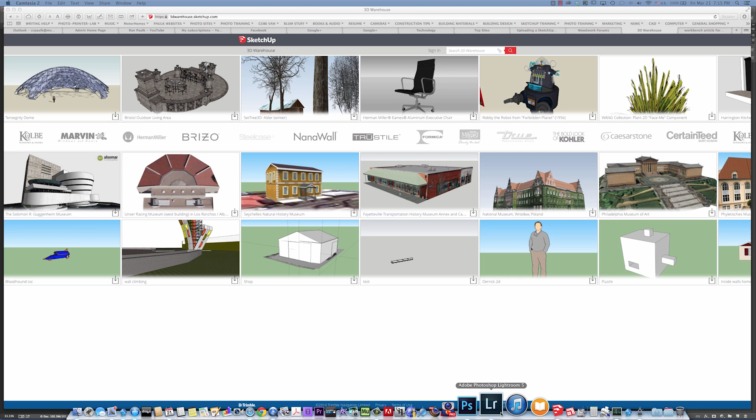Hit the R key for rectangle, and enter in 1 foot by 8. Enter - oh, it turned it that way. That's all right, we'll go that way with it. So next thing, double left click, right click, make group.

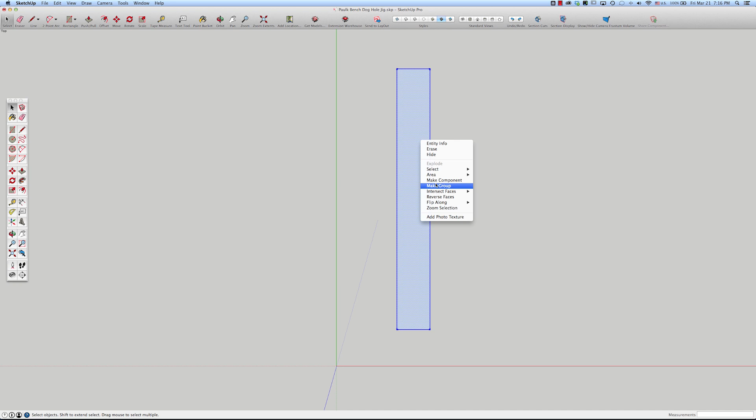So this jig is temporarily put dimensions on it, 1 foot by 8 feet. And I'll hit the T for the tape measure tool and drag.

This will be the reference edge. We'll drag that out to 8 inches, type in 8. When you enter your dimensions in, if you're doing inches in the feet and inch setup, you don't have to enter in the inch mark, but you have to enter in the foot mark. If you want to type in 8 inches, you just type 8, enter.

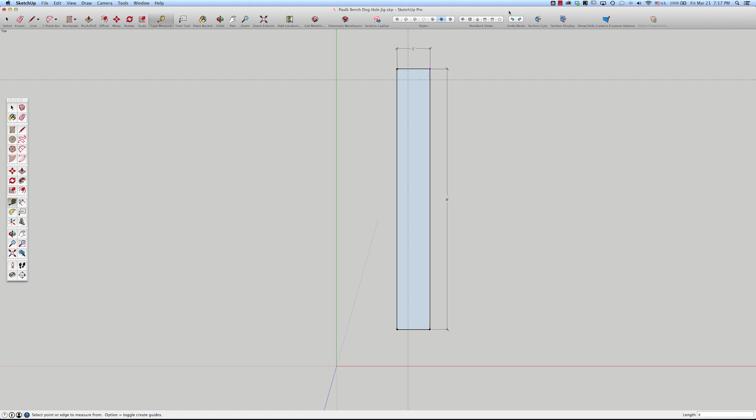And I want to start the first hole 4 inches in from the edge, so 4, enter. I'll need a couple more guidelines later, but for now we'll start.

Now, before I go in and do the holes, I know I want them 15/16, but if you want to figure out your own sizing, the way I determine what size hole to drill is I know I'm using a router template guide, which adds 1/16 of an inch all the way around to my circle diameter. The way you can figure it out yourself is if you measure your router bit and your template guide, the difference between the two is how much you want to grow the hole by.

And I know I want the hole to be 20 millimeters as my finished dimension. So I'll hit the C key for circle - this is just a temporary option here, escape out of there and Command Z. So I've got my circle tool, I'm just going to drag it out and enter in 10 millimeters because we're going from the center. I know the diameter I want to be 20, so 10 millimeters, enter. Now even though I am working in feet and inches, I can enter things in as millimeters.

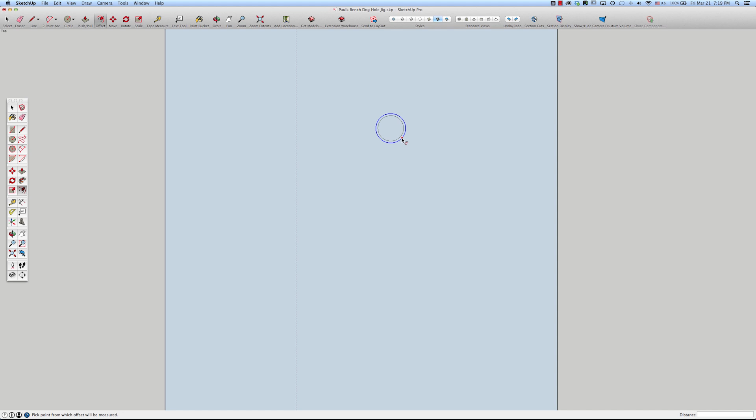Now what I'll do is choose this tool here to the left, which is the offset tool, it's the F key. Hit the F key, grab this edge and draw it out, left click, and I'm going to type in 1/16 inch. So I've added 1/16 of an inch to the 20 millimeters - I started with 20 and added the 16th. So I know this is 15/16, but just to show you how I came up with that, this is the methodology.

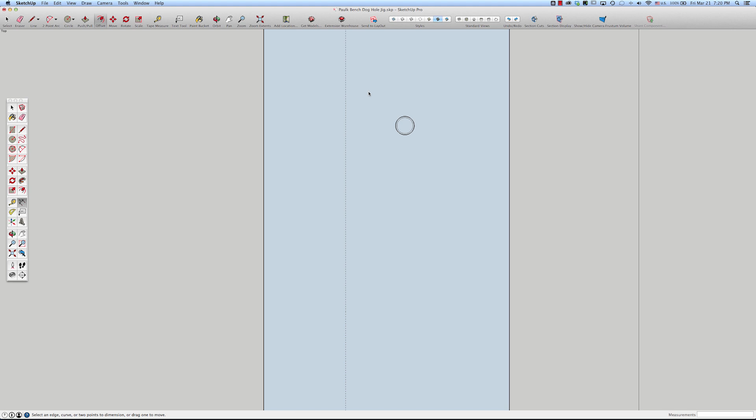I can do it right here in SketchUp. So if I want to double check that, I can grab the dimension tool and just click on the edge of it, and it will automatically draw the dimension. So the diameter is 15/16. Command Z to delete that - I don't need any of this, but that was just a way to show you how you can arrive at that. So I'll just hit my space bar, select that, delete.

Now I know I want the first hole - I'm actually going to be adding a hole closer, but for the initial layout and for the majority of the holes, they're going to be 8 inches in from this edge, 4 inches in from the end, and 4 inches apart.

The reason for the 8-inch offset here is for the first series of holes, I will be clamping this to the edge of the bench, flush it up, and as long as my bench top is square, I will get the series of holes perfectly in a line 8 inches. Then I will use the offset pegs that will drop into these holes once they're drilled to do the rest. So that's the reason this is 12 by 8.

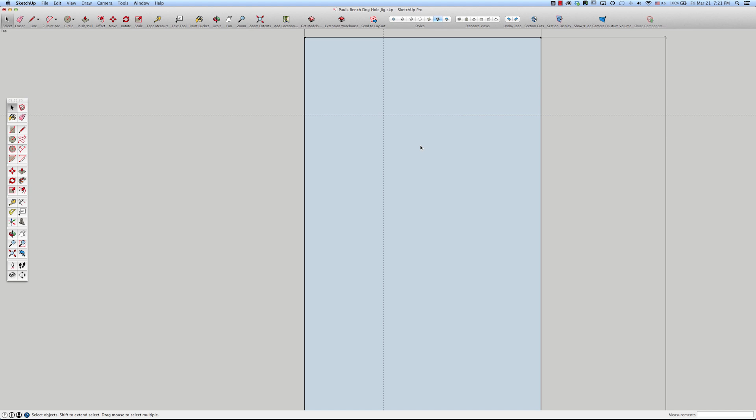To make the holes in the surface, I need to go into the surface. Right now, if I drew a circle on top, it would look fine. Type in 15/16, enter, click on it, delete the center, and it's still there. That's because the hole did not cut through this geometry, because I'm not in the geometry — it's locked up in a group. So Command Z to get rid of it.

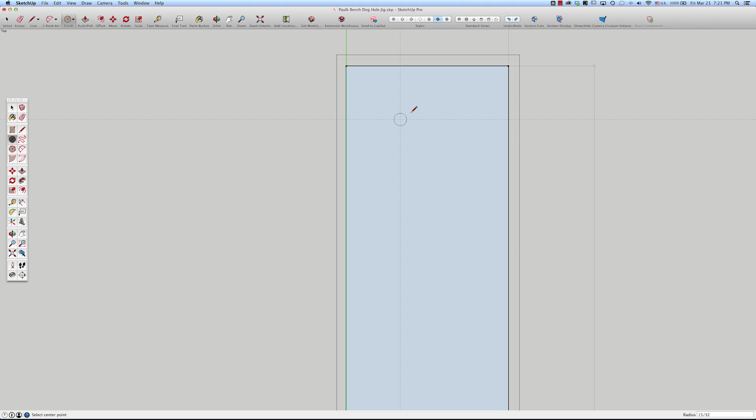Double left click again, and you can see I'm in the surface. Now if I hit my circle tool, I want to draw 15/16, but just like the millimeters, I'm drawing from the center, so it's half. Half of 15/16 is 15/32, enter, and then go inside. Now I have the surface divided into 2 parts here. So I'm going to delete the hole just like I drilled it in the shop.

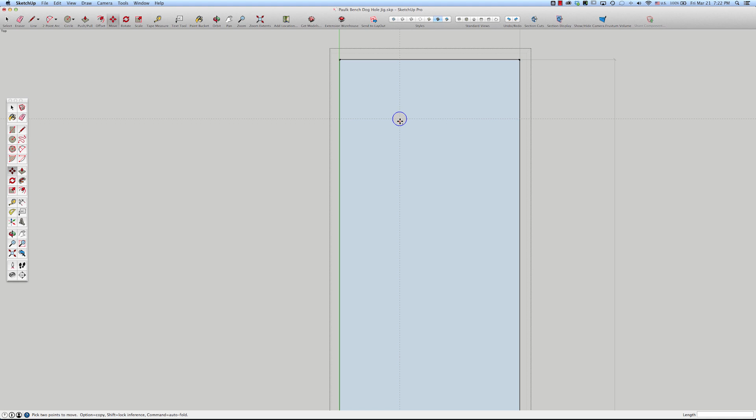Now what I want to do is click on the circle, the hole, tap the M key for move, tap the Option key for copy. That gives me the arrow on the copy, turning the move key into the copy key. I want to grab the center, that's my reference point, and you can see how it will grab onto there, a little red X — it's grabbing onto the cross of these 2 guidelines, centered in the hole.

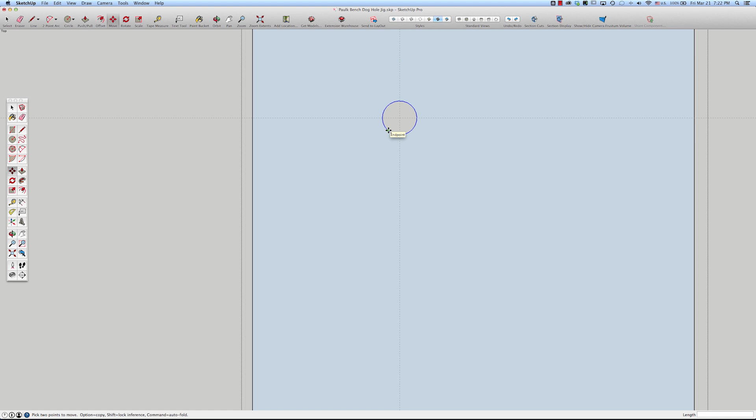Now I want to make sure it's centered in the hole in case my guidelines are off. If I touch the edge, not clicking, just touching the edge of the circle — and you can do this with any geometry — and move over, you see it says center. That is the center of the circle, which lines up perfectly with the guidelines because that's how I drew it. But if I were off, I'd want to find the center of the circle.

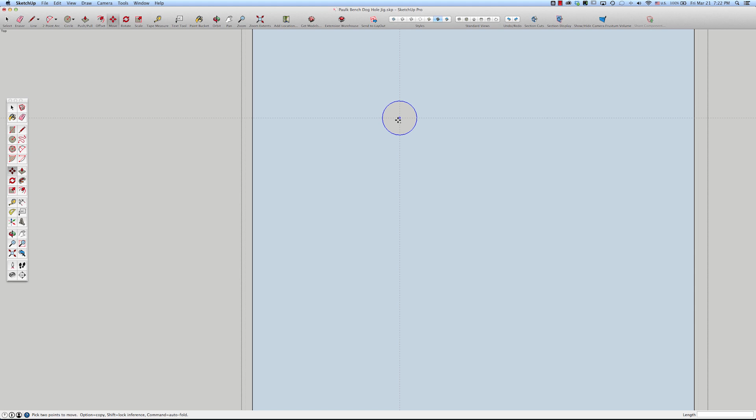So I've got the move key set up. I'm going to left click, drag, click again, and type 4, enter. That has given me a spacing of 4 inches. Now I want to run that along this whole guideline at 4-inch spacing all the way through. I haven't done anything else other than enter the 4.

Now I'm going to type the X key, and I could count up the exact number of holes, but a quicker way is to guesstimate. Let's try 24, enter. You can see it's laid out the holes perfectly on 4-inch centers, but it's given me 2 more holes than I need, so I still haven't done anything. I'm going to type the X key, 22, enter, and now I have 15/16 inch holes set 4 inches in from the ends and spaced 4 inches apart, all in that quick, easy step. If I weren't talking my way through this, that's a real quick and easy thing to do.

So I'll click out of the group, and now I want to set up a few additional holes. This jig is 8 feet, but it's also going to work for a 6-foot bench. I want the ability to have a series of holes 2 inches in from the ends of both the 8-foot and the 6-foot. Also, when I do my reference holes, I'll do a set that is 4 inches and 6 inches, which will give me a 2-inch offset that way. You'll see that here quickly.

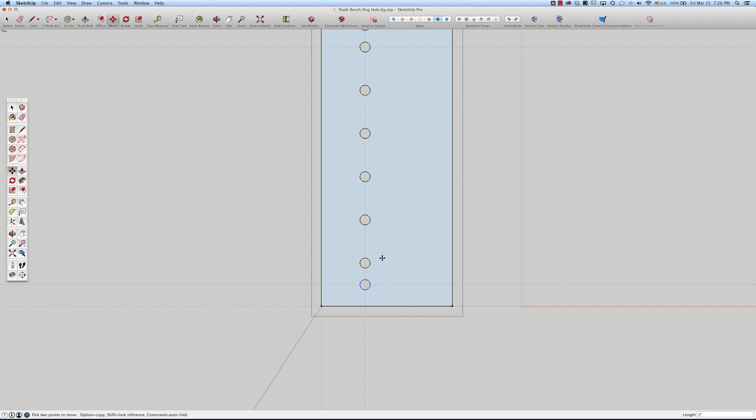I'm going to do the same thing on this end. Move, option key, tap the edge, find center, move this back up here, grab that, move, copy, find center, drag it, click, and we're set there. Then one more at the top edge.

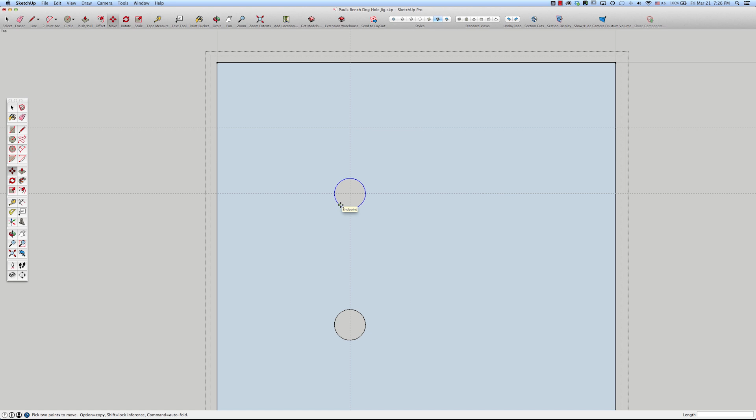I'm zooming in and out with my scroll wheel on my mouse. So again, click on this to highlight it, M for move, option for copy, find center. You can see how it's finding the intersection, but it doesn't say center. I know that's the center, but to confirm it, I'll touch the edge, come over, and it finds center. Then click there.

Now I have all of the holes I'm going to need to run the template guide in. Now I want to set up the reference holes that I'll use the peg to drop in, to line up one series of holes to another.

It doesn't really matter where you put them. I just want to be able to use 3 pegs, so I'm going to set up a hole from the 8-foot end on both ends. I'm going to set up one from the 6-foot end, and then drop another one somewhere in the middle of the 6-foot. I'll probably offset it to this end of the 6-foot.

Now these holes need to be 20 millimeters, because the reference peg will need to drop into the holes that I've routed with these, and those are going to be 20 millimeters. So these holes I'll be drilling now will be 20 millimeters.

To do that, I'm going to get rid of some guidelines, delete those—I'm dragging. When I drag from right to left, anything inside the bounding box, or touching the bounding box, will be highlighted. If I drag from left to right, it doesn't select them. So dragging from right to left, get rid of those.

Actually, I don't want to do that. I want to get rid of this one, and this one. I could just click on it since it's just one. I'm leaving that one because it's my 6-foot mark, and I just want to remember where that is.

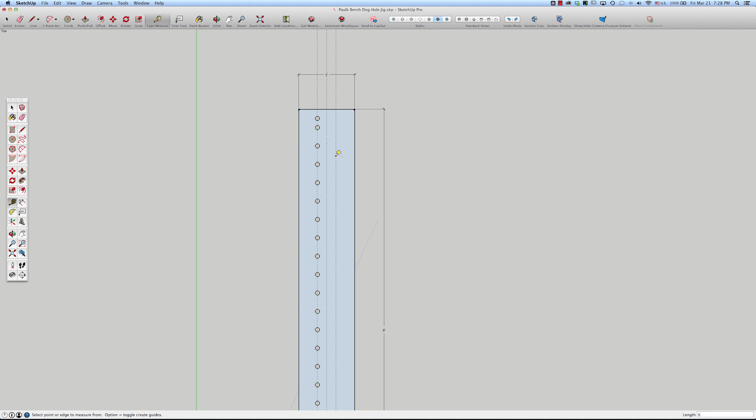I think I'll put the first hole for this side—I'll come into the second hole in, which is 8 inches. I'll just bring that in. I could come and reference the center of this hole, and that will give me a perfect lineup. You can see the center there. So that's 8 inches in.

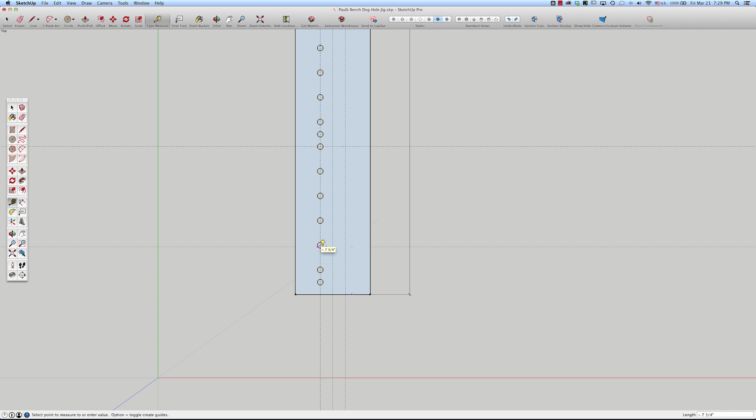Do the same thing on the other end. Grab here, come in and reference here, touch it. I could type in 8 inches also, but I know I want to line up with these holes, so that gives me the end pegs for both ends of the 8-footer. Now I want to put it in for the 6-footer. So tap that circle there, click there.

Somewhere, doesn't really matter where, but I'll offset it to this end. I'm going to reference off one of these and just eyeball it, going to this one here. Actually, I'll drop it back, and one more. There we go. I'll go to there and just find center.

Click. So I know I want to have double 20 millimeter holes, a 20 millimeter hole at each intersection, with the exception of the 6 foot. I'm going to go ahead and get rid of that so I don't mistakenly do that.

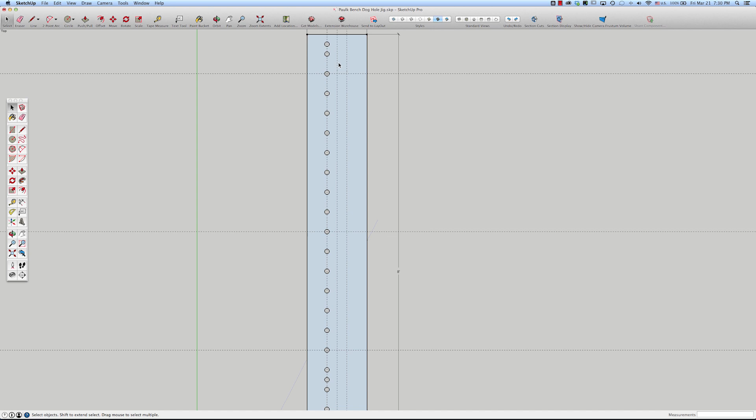So what I'll do is go into the group, double left click again, C key for circle. I'm going to draw this out, click, 10 millimeters, enter. That gives me a 20 millimeter hole.

Click inside of it, delete it, and then I want to copy that. Click on it with the selection tool by hitting the space bar, M key for move, Option key for copy, tap the edge, grab the center, move over, drop it right there.

Now I want to move this pair of holes, so I'll drag my bounding box from left to right, and it will only select what's completely inside the box. If I did it the other way, I'd be getting a lot more stuff, anything it touched. So I know I want to drag this direction.

M for move, Option for copy. I want to grab the center, touch the edge, grab the center, and I will drag it down until I get lined up on my guideline, drop it in there.

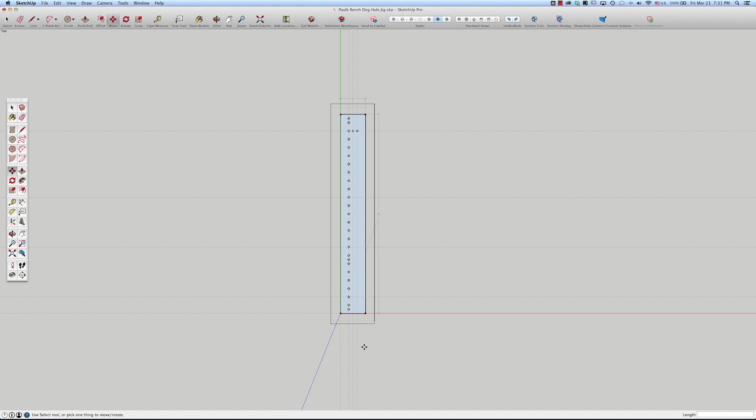Now I can't use the repeat copy, multiple copy, like I did before, because these aren't set up exactly the same distance. If I hit X, say 2 now, X2, enter, you can see it drops the other set out there. So I'm going to Command Z back out of that, and that deleted my copy.

I'll do this one more time. I'm going to click into the surface, M for move, Option for copy. Again, grab center. And this would be going a lot quicker if I were not talking my way through it and trying to show you exactly how I'm doing this.

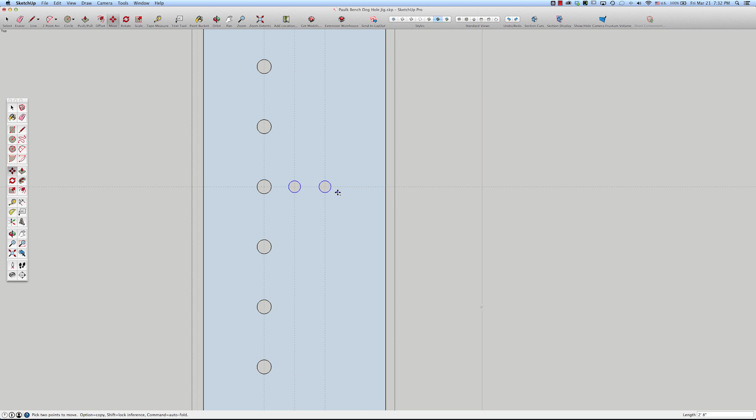Now I already have those selected, so I don't need to select them again. All I need to do is tap the Option key one more time. That puts it back in copy mode. Drag these down, drop them right where I want them here.

Click. And again, I'm already selected, and I've already got the move tool, so all I have to do is tap the Option key, find center, and drop it right there.

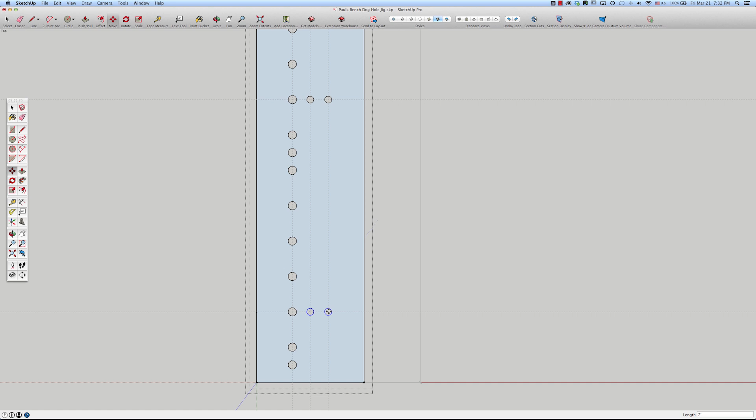All right, so now the jig is all cut and ready to go, so I'm going to edit, delete guides. I'm going to orbit around just a little bit, go down.

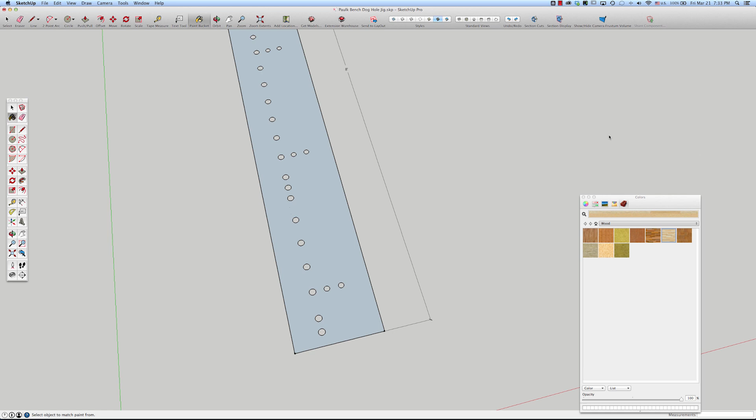Just for fun, I'm going to give this a little wood color. I'm going to hit the B key for bucket, and let's see, I'm going to choose colors, and we'll get something that's kind of a wood color there, and then just drop it in. That's not quite right, let's go here. So I've given it a color.

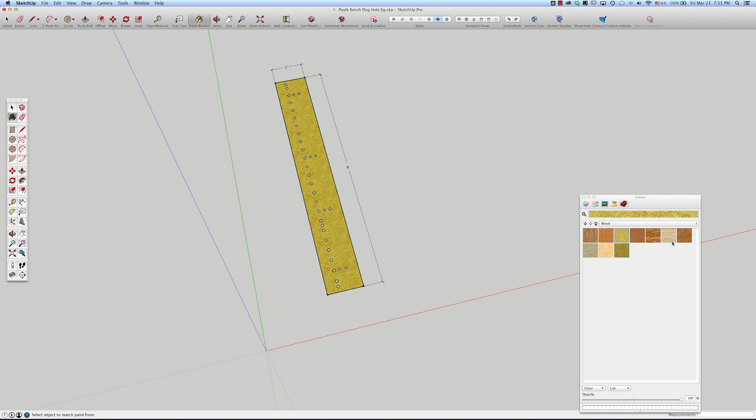And I could, if I wanted to make it look like wood, you can download a lot of textures. I have a lot more, but I don't have them loaded in this model. So I could use a strand board there, or here, or I could use just a hardwood.

And then one quick thing I can show you now, when you're dropping a texture on, you can see that it's not running in the direction I want. If I right click, I would be looking for the ability to adjust the texture, but it's not here because it's in a group.

So if I go into the group and click on it and right click, I still don't have that option. So what I've discovered, and there may be other ways to do this, but temporarily I'm going to click into the group, or just select it with one click, right click, and I'm going to explode it.

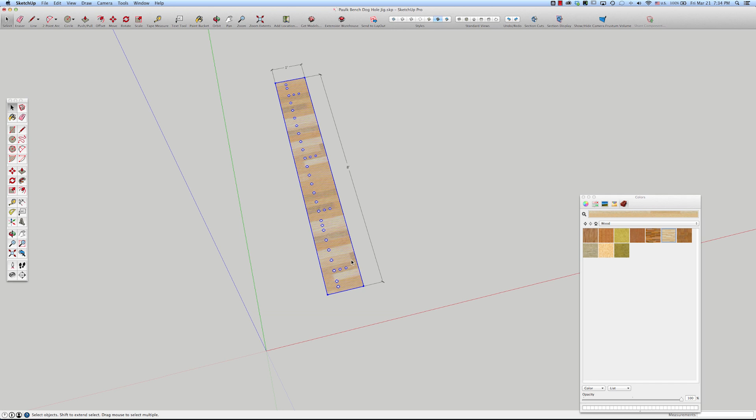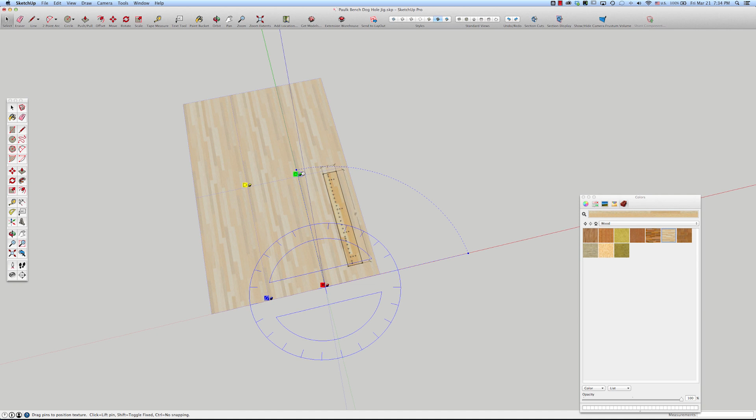So now it's not protected in its group, but if I right click now, get in here, right click where it says texture, you see this was not available before, it says position. Then I will grab the green push pin here, drag it around 90 degrees, and I can zoom in and out to get it the proper size, and click out, and now double click, right click, make group.

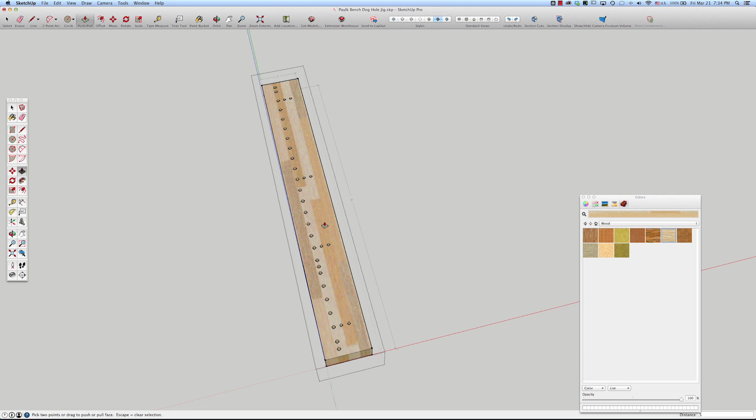It's important to put it back in a group. So now we got it looking like wood, and the only other thing we need to do is make it 1/2 inch thick. So I'll double click in it, click again on the surface, P key for push pull, drag it up, type in 0.5, enter, and now it is 1/2 inch thick.

So the jig is ready to go. All we need to do is make the pegs.

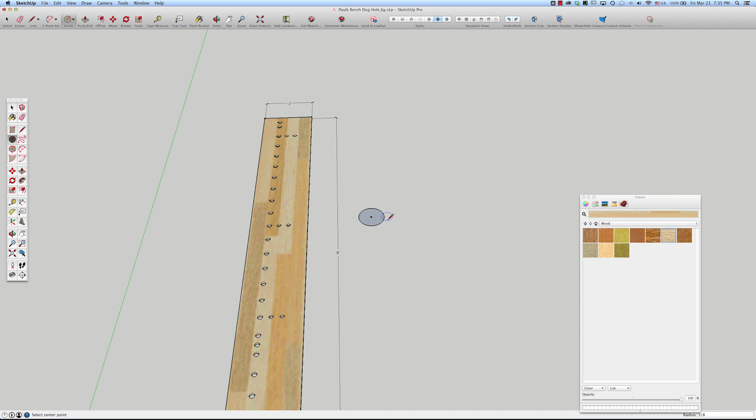So the pegs, in my case, and this will be a separate group, a separate entity. So I'm going to hit the circle key. And my pegs were 1 1/4 inches, so I know that to get that I need to type in 5/8, and that gives me 1 1/4 inches. I can double check that with the dimension tool, and sure enough, 1 1/4 inches. Command Z to get out of that.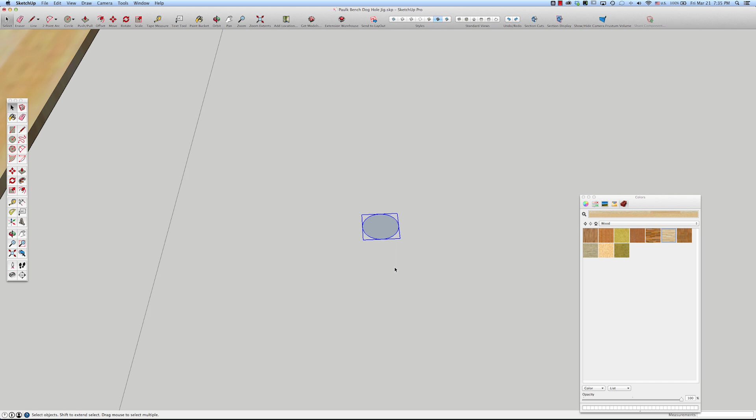All right, so I know that I'm going to make the peg overall 4 inches long. So I'll click, first I'm going to double click, right click, make group. Then I'm going to double click, get into it, click on the surface, and I'm actually going to hit my bucket tool and give this a wood finish as well. And hit the P key for push pull, drag it up, type in 4 inches.

So the dowel, the closet rod that I bought was 1 1/4 inches, and I needed to taper it down just 1 inch of it down to 20 millimeters so it will fit in the reference holes on the jig. Pretty easy to do.

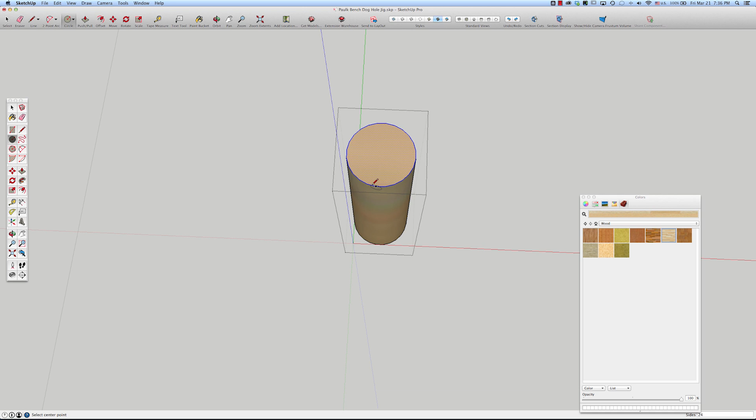Come in here, click on the surface, hit the circle tool. I want to find center, so I touch that edge there. You can see I can draw on the side of this. You can do a lot of interesting things, but I want to find center. Found center, draw it out. Left click, 10 millimeters, enter.

And now I'll grab this surface. I've divided it into 2, and I'll hit the push-pull tool, push it down 1 inch. Get out of the group.

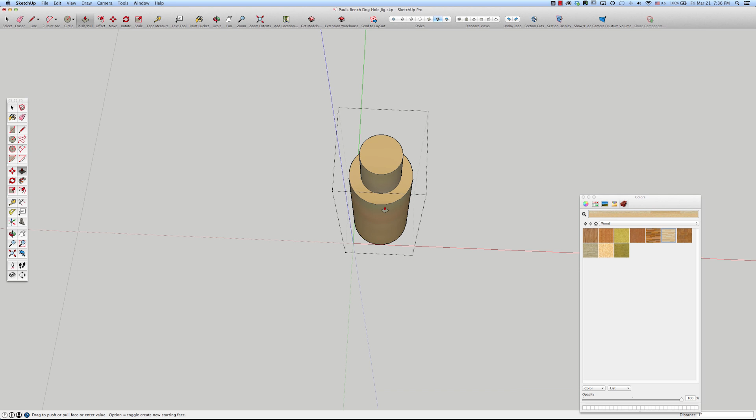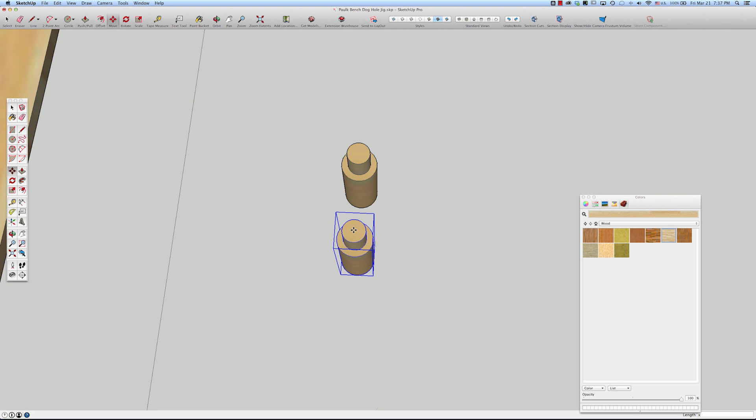And I want to have 3 of these guys for purposes of making the jig. So I'll hit M for move, the Option key or the Alt key for copy, and it doesn't really matter where I grab it, just move it over in the green direction so they stay on the same plane. Left click to drop it, X, 2, enter, and I got 3 of them.

So there you have it. That is all there is to make that jig. So I did not provide these in the plans. I wanted to show you how to make it.

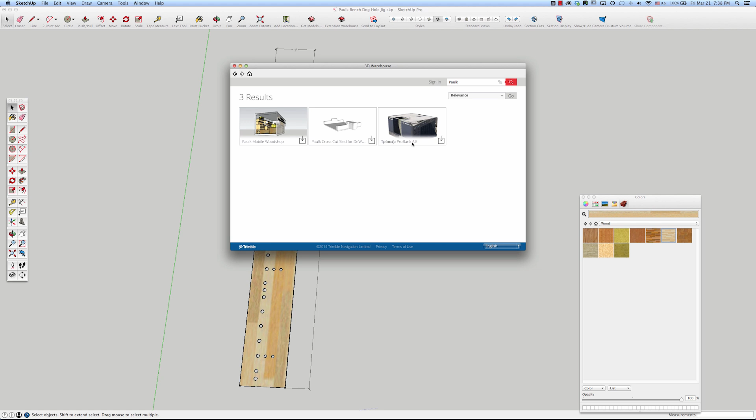Now, the reason I'm not uploading currently is normally all I would do is come in and go File, then 3D Warehouse, Share Model, and OK. I'm having this problem right here, it's not letting me sign in. I've sent off a ticket to SketchUp. I can't sign in directly or here or any way, so I'm not sure what's going on. This will just go on for hours. So anyway, I cannot upload the model at the moment, but as soon as I get that working, I'll upload this model. But there you have it.

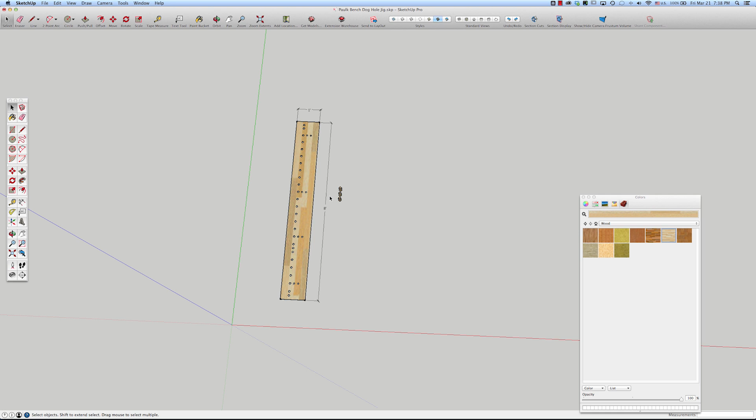If you want to just recreate it yourself, you can watch this video again. It's a bit long-winded, but I wanted to show exactly how I did it. And again, another lesson in how easy it is to do modeling for your woodworking projects in SketchUp.